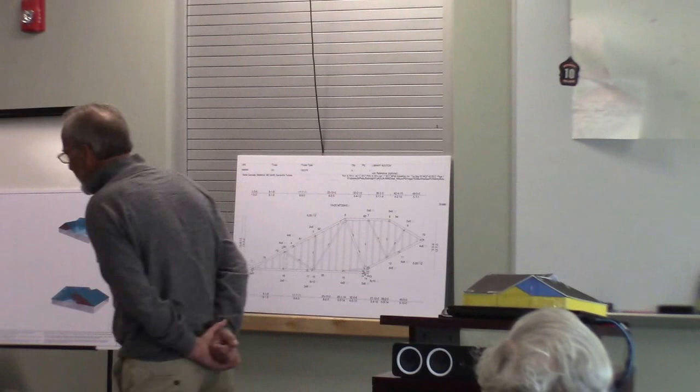There's another problem that we keep running into, and that is the 66% vote threshold. It may be that someday they'll get a 66% vote. And if that's the case, if there are people in the library management that think they're going to get a 66% vote, why not just bring back your 9,600 square foot building? If you've got the votes to do it, what's a few hundred thousand dollars one way or the other?

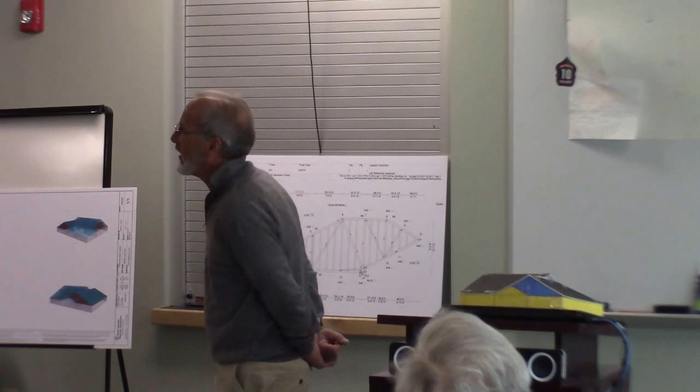So my proposal here goes to the strength of the people that seem to consistently vote for a library, and that means it will just require a majority vote. The reason it'll just require a majority vote is because what I've illustrated here will come in at about $1.3 million for 8,625 feet. That's 400 feet larger than the 8,200 square foot building.

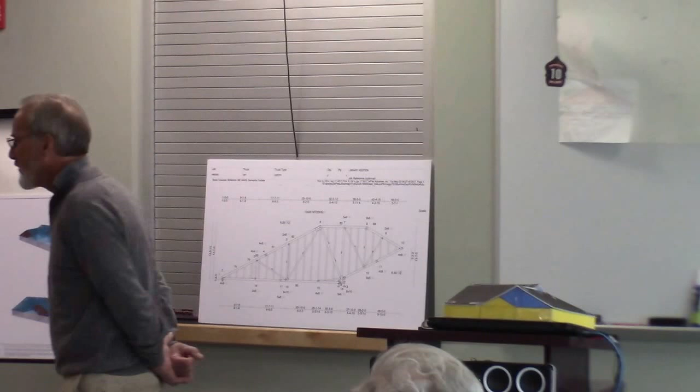And we currently have $700,000. In fact, I asked Jackie Rollins and Karen to look into the access for the $400,000 that the town has set aside for construction. It sounds like we no longer have access to just $180,000, which is what the vote was back when Anna Nucci was chairman of the trustees. But we actually have access to the full $400,000 because of the way it was worded.

So that means, theoretically, if the selectmen want to get on board with this and the trustees want to get on board with this, we could actually start work right away. You could start putting in your driveway, and I've talked to Jack Parsons about this. He says it's well within his capacities and duties that he's performed in the past to find somebody who could cut the trees and stump the land and put gravel down, which in my view would be a really good thing to do because it would demonstrate to the town that we're taking a practical approach to solving a problem.

And it would tie in very nicely with the fundraising program that I understand is going to start shortly. When people start actually seeing some kind of construction going forward, they're more likely to want to donate because they think they're going to see the results of their donation. So it ties in really nice.

With $700,000 and an active campaign to raise more funds going on, I'm pretty certain that you could get all of your concrete work done and walls partially done and partially the roof done. What this allows you to do is to use the library continuously while this construction is going on.

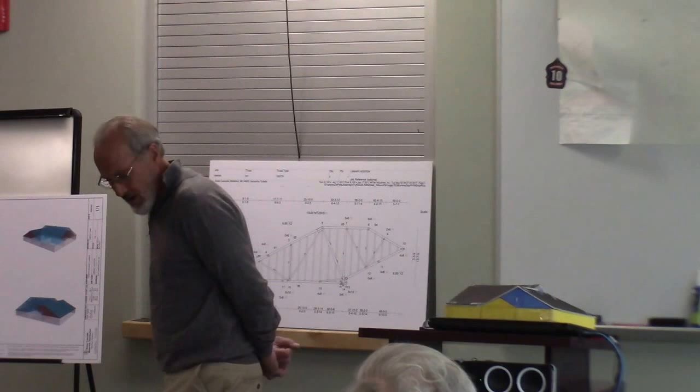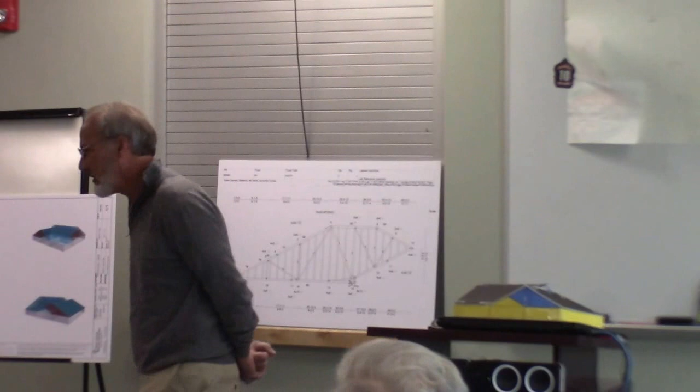You could do it in stages. So if in March we realize that we're $400,000 or $500,000 short, we could create a warrant article, and with a simple majority vote, we could get the funds necessary to complete the job. We have in the past used warrant articles to buy a fire truck outright for $500,000, so it's not out of the norm for anybody to take this action.

So what I've done here is established a base on cost and doability. With an architect involved, they could design a completely different roof. They could design it so that it gives you a great deal more headroom. They could use scissor truss, or supported ridge construction. You could do a number of things. Mine is just for simplicity and economy. You don't have to build this, but it does establish a base that I believe pretty clearly can get done for $1.3 million.

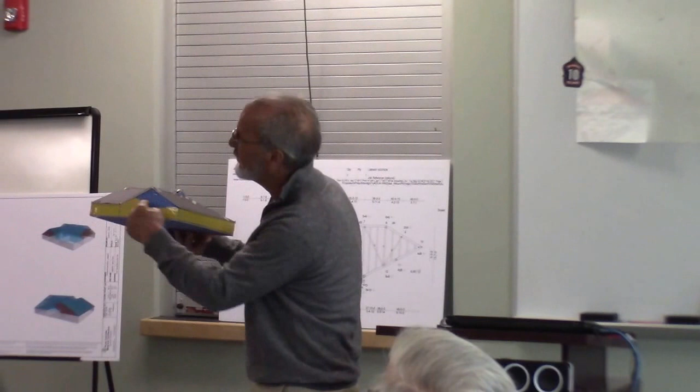So what I've done is I've created this model. This is the current building, looking at it from the fire pond. These are the outside walls right here and here. This is the roof, that is this picture right here. I don't know if you can see it or not.

So what I've done is I've taken this building, this 32 feet in width, and I've put it in front of the current building. From the face of this building to the end of the blacktop is about 52 feet, so this width here is 32 feet. If it was put out here, you'd still have 20 feet of blacktop that you have not interfered with. This roof angle is the same, just moved it out. This is the same pitch, a 6 pitch. And what this is showing you is what a cantilevered truss looks like.

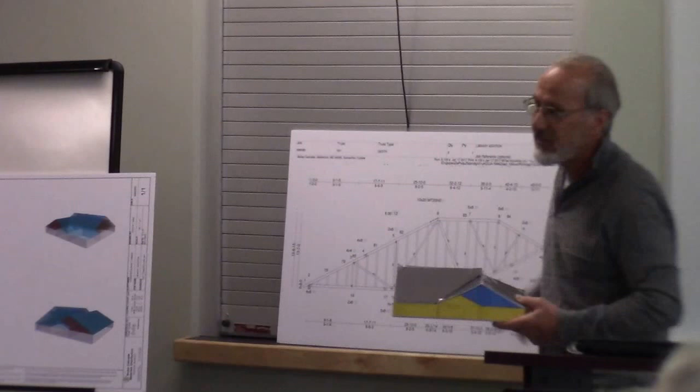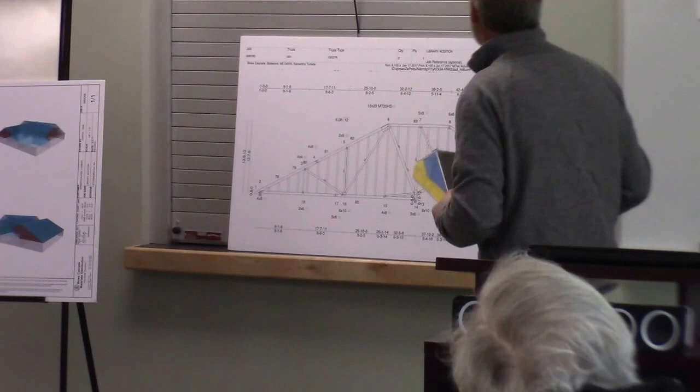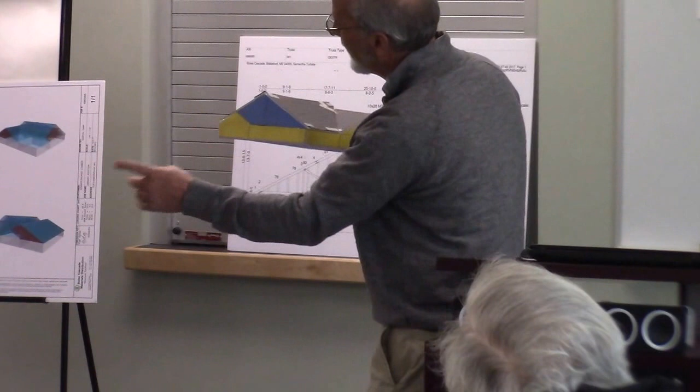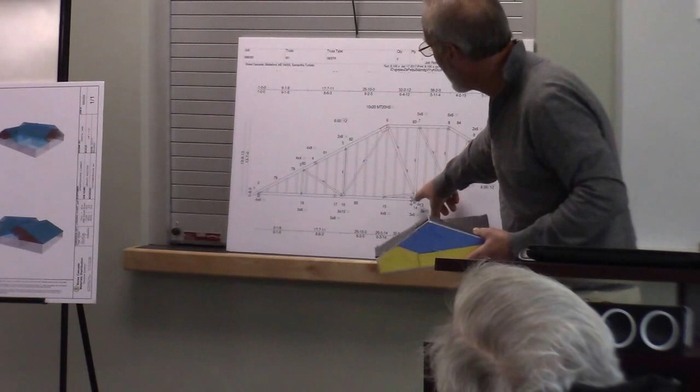This is actually the truss for this part of the roof, this design right here. What a cantilever roof allows you to do is take all the loading on this side of the roof that would extend, for instance, from this profile of the meeting room looking at it from the woods. This section of roof right here, if you were to use this roof to support this load here, you would have to reinforce this section of roof because you would be increasing the load on it. But with a cantilevered truss, you're taking the load that would be on this section of the roof here and putting it down on the load-bearing wall right here, so you do not have to reinforce any of the existing roof.

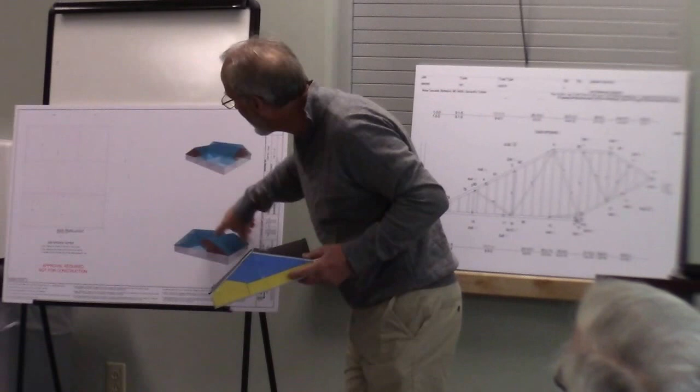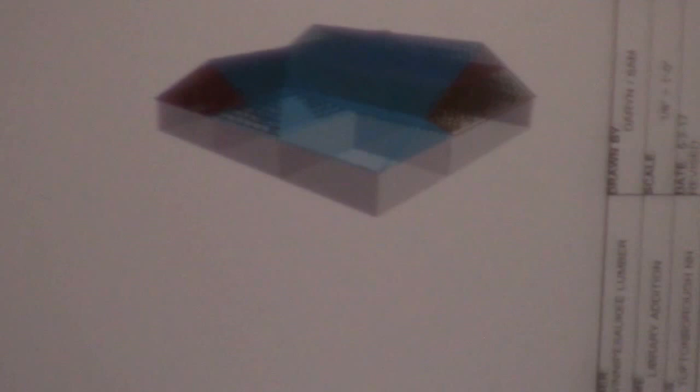On this diagram here, this shows the same cantilevered roof design, and this is the same cantilevered roof design. Now as you move into the other roof in this section here, you are not increasing the load on the roof, you are changing the direction of the load. All this load right through here is equally distributed on the existing roof. You will perhaps have to reinforce the roof at about the midway section on the valley, but an engineer would be better to look at that. The reason I'm bringing that out is to reinforce the roof in these areas. There's a lot of simple, very economic ways to do that. When you say reinforcing the roof, it's not a booger booger thing, it's very, very straightforward and economic.

Now, I went ahead and had the engineer that designed this stuff price it out, and to do all of this roof here in trusses, like I've demonstrated, the bill would be $45,000 to buy all the trusses. If you wanted to then use the figure of $200 a square to cover the plywood and the shingles, you're at about $70,000 to provide a roof. We haven't factored in the labor, so let's be generous and say $70,000 for labor. That's $140,000 to complete this roof.

That still leaves you with 1.1 or 1.16 million, something like that, to spend on whatever else you think you need to spend it on.

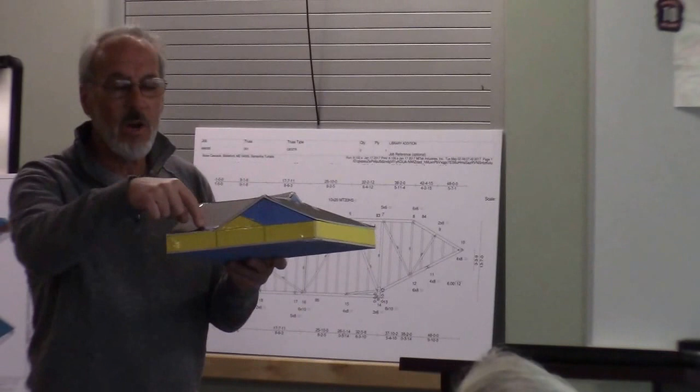Now this section right here is the existing meeting room. What I'm doing is taking this, again this is the side, that picture over there. We walk around this corner and down the path into the meeting room, so I'm simply boxing in this path that we use to get to the meeting room. This is 1,900 square feet. The total footage I'm creating is 4,725 feet. This is almost half of the footage I'm creating, and it's the cheapest footage in the whole building because it's simply a meeting room.

It needs two walls, this wall and a door here. Or you could put a door wherever you want, you could put windows in. But you only need two walls and you need a radiant slab.

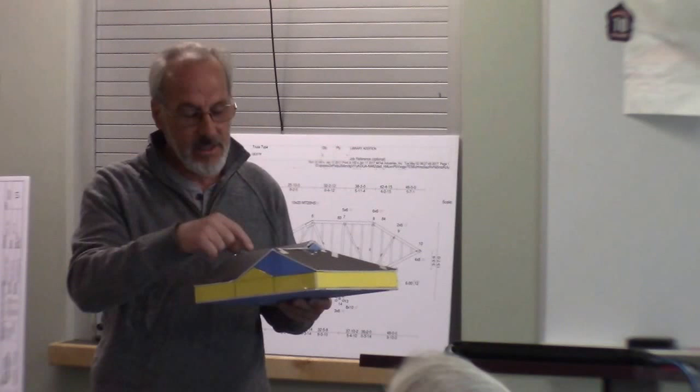What's really neat is the furnace room is currently located right next to this space I'm creating. I've had a fellow I've done work with for 15 years, his name's Mike Strojan, he runs Service Experts, he's done all my HVAC work at the compound. I had him come out and look at the furnace room, and he said no problem.

You pull the oil burner out, get rid of the oil tank, put two gas-fired boilers in that room, plug your masonry chimney since you don't need it anymore, and put two PVC intakes and exhaust right out the roof. That means you don't have to build a chimney - that's a big savings too. You don't even really have to tear the chimney down because the roof will cover it all, you can cap it at both places.

He looked at the manifolding on that boiler and our water supply is more than adequate, so you can just tap off the existing manifold to pipe right into your radiant heat slab.

Also, to install air circulation, you need an air circulation system for a building like this with a number of people it can hold - you want air circulating all the time. So you put in your air circulation system, your radiant heat, and your air conditioning. The air compressors would fit back in this section here.

You don't need any bathrooms for this additional space that I created - this space would seat 100 people. Why don't you need bathrooms? Because we've already got two bathrooms there, and they already have a door that separates the meeting room from the library. This is a 100 seat capacity meeting room, and what you need for a library is one toilet for every 50 people.

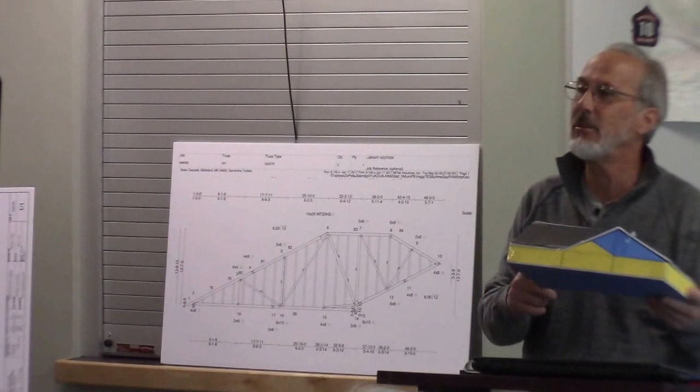So another interesting thing - somebody said they were concerned about the parking. Well, I went and accessed the police facilities report, and it has, on the end of this building, attached to the end of the meeting room, a 32-foot garage. So I'm assuming they did their work - they were going to drive a car right along this side and use this garage. That would imply to me that you have plenty of space on this side of the building to park cars.

So the 10 spaces, I think it's 10 spaces, that you're losing on the front of this building right now, you can make up on this side of the building. So you haven't lost any of the close parking that you currently have to the building. Oh, and by the way, those bathrooms are already handicap bathrooms, so they don't need to be modified.

Now, the rest of the parking area would be as depicted in the 9,600 square foot building that they had. It would be a little further away, but the distance from that parking area to any of the doors put in here is not any greater than the distance from the Wolfeboro parking area to the front door of the Wolfeboro Library.

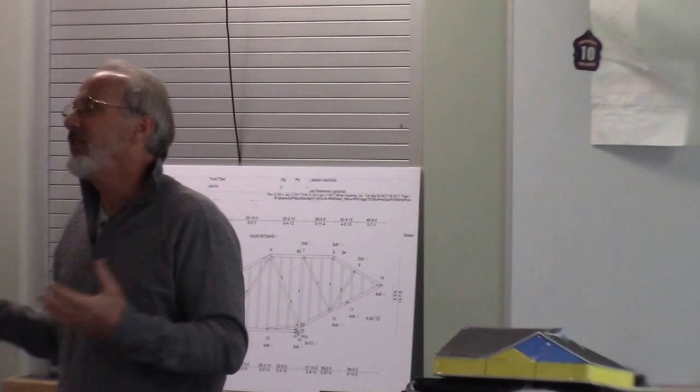So just about everything works in our favor. You're starting with 3,900 square feet that's already a library. There's a little bit of irony to this whole thing. My whole story, my whole demonstration is, those of us on the committee, after we voted to have SMP as our architect, Helen and I were the last to hold out. We really wanted Lemire, who's doing Wolfeboro.

But in any case, after we went with SMP, somebody on the committee turned to Christie and asked, what was so special about SMP? Why them? Why did you guys really want them? And Christie's response was that the state librarian said they did a great job on the Durham library. That stuck in my mind because I was thinking, what the hell, we're asking somebody to build a new library. We're not asking anybody to remodel a library.

For those of you that don't know anything about the Durham library, it was a residence, a home that somebody bought, a town bought, I guess. And SMP went in and put an addition on it and converted the whole thing into what is a really nice library. So here I am now standing before you saying, gee, I think we got the perfect outfit for showing us how to remodel an existing library.

And I think we got some really big savings. And most importantly, if this is played right, we don't need to worry about a 60% vote.

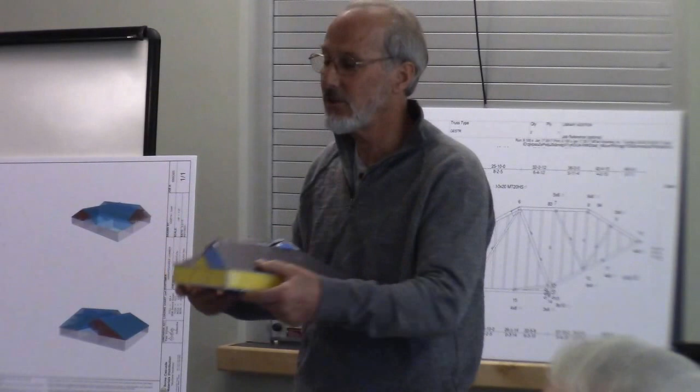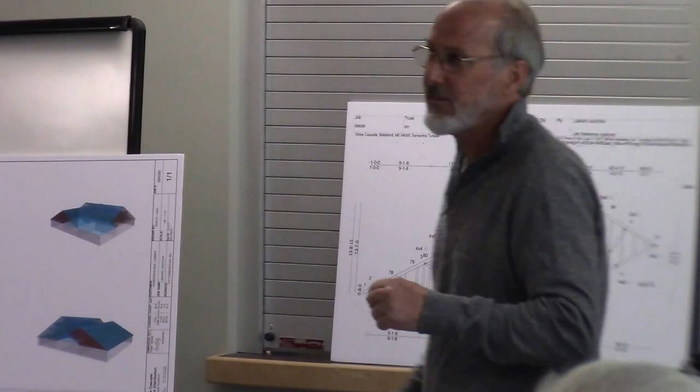You could do it. I did it on this. You could do it here. You can do a whole bunch, so you could have a very impressive building right close to the road. We had one architect come in and say, hey, you want your library close to the road, you want it to say here we are, we're smart people, we have a library. That would be a lot more impressive than the all-roof black side that you see there.

If you could do that, you could put a scissor truss in there, so when you walked in you'd get a much higher ceiling area. Well, of course there are costs to that, but...

Go ahead, sorry. No, thank you.

It would be very impressive having that profile gable end right close to the road like that. Impressive is a big word, and it would be a big facade.

So I would say that, given what we heard from the community during the last design about trying to have the building fit in and be more traditional in its design details, that would contradict it. So we would look to a different form, of which I think you're open to.

The last thing I'd like to add, since I'm offering—thank you for your kind comments about Durham. Durham Public Library is a very successful project, and yet utilizing the home that was part of the requirement did not save the town or the library anything. It only cost them, because it's easier building something new that's clean and fresh and new. It's very efficient and fast.

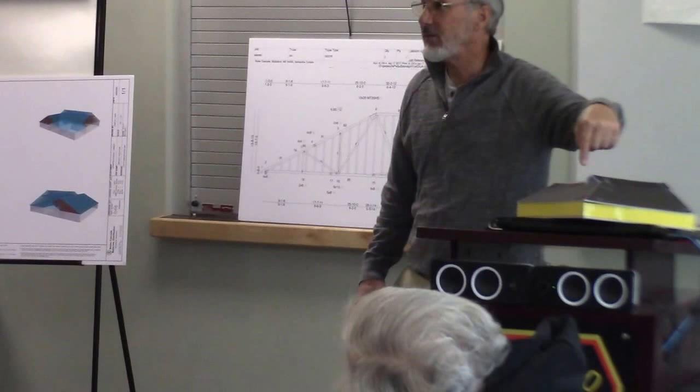Okay, so then I would suggest that if you're going to be doing the work and giving us several options, you go ahead and do what I've illustrated here, and show us where I erred and why it would be much more than the $1.3 million I'm suggesting it would be. It really wouldn't be fair to come up and design something completely different with a completely different roof line and maintain that now we're looking at $2 million. If we're going to play fair, we need to do my study, do my roof line, price it out in the mix of what you're going to do, so that I would know where I was wrong.

If this is what's coming down, if we're going to make these kinds of suggestions, I want to know the facts. Yeah, Dave. Skip, first I want to congratulate you and thank you for the work you've done. You did a lot of hard work here, and you're a bulldog and you know how to get things done, but sometimes you do get tunnel vision.

I want to address a couple things you said. First on the wetlands, I looked at the letter from Jim Rines again. What he was saying is if you fill wetlands on that site, they'll look at how you can mitigate, or if you have other alternatives. We had the alternative across the street, but in your design you've tightened it up so much there'd be very little wetland impact, unless we add the additional driveway for more parking in back. That would be the question. I don't think we ever said it was a major issue for us, in combination with the other issues, like how do you run a construction project on both sides of your walls while still trying to operate a library. So there were a lot of issues that led to saying let's go to the new site.

Now let's talk about the renovation of the building, because the building is still - how old is the existing building? Part of it's from 1970 and the other part's from 1991. So it's 40 years plus.

So within that's an asset. And with regard to doing an upgrade, clearly we'd want to be upgrading the floors, the windows, the mechanical systems, and the electrical systems. Electrical systems don't last, so I don't know if that cost was included, and I think that's one of the things Anthony was alluding to. We've got to look at the renovation of that existing space as a real cost, because we want this building to last for 50 years. We can't expect a building that's 30 to 40 years old to just tack onto and go.

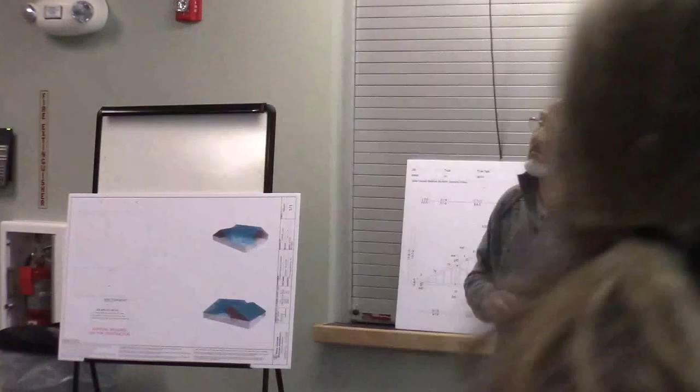We're going big on asset management, and it's something that communities don't understand. But if you own this asset and you want it to last another 50 years, I would definitely have an electrician or electrical engineer look at the electrical system, because if it's at 40 years and going towards 50, it is at the end of its useful life. It may be time that all the wires need to get pulled. It may not be a big item, but it's something. You don't want to build a new building on top of an old building that has older assets. You like to bring them all up so that you can plan for it going forward. Just a comment, and that may not be a mistake, it's just maybe being a little more conservative, and I think the town would want to make sure we plan for those things.

Sure, no, I have no objection to looking at all those. I'm wondering if I could just get a ballpark figure, how much it would cost to get plans for Skip's proposal, and would it be turnkey like our other estimate, which would include all the stacks, the furniture, everything that was included in that previous estimate?

Well, on the new building, we've allocated 100,000 for furniture. Any idea? Well, Anthony just threw the figure out.

I thought it was $18,000 to do a conceptual schematic study. So we'd be spending $18,000 to see if this would work for us? Yeah, that would be one of many that he's going to do.

My other question is, does the current library have central AC? No, I don't think it does.

Okay, gotcha. So with that conceptual schematic plan, we would have options for you all and us to talk about and select one, hopefully. It's more or less what we did with the past building design. Then, once we have agreement, we would be able to have the whole team of engineers put a fee together for what it would be to do a full set of construction documents.